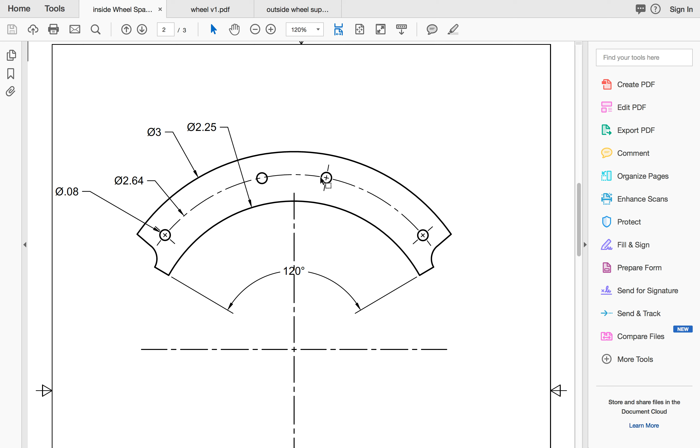Okay, this is going to be part 2 of the wheel thing. We're going to be working on the inside spacer, right here. This kind of goes, and all it is, because the rubber band thickness is thicker than the wheel itself, or than the material we're using, which is about 0.125, and the rubber band's a little under 0.25, so we want to double it up and make space for it. So we'll have this across. We're going to do it in 3 separate pieces instead of 1, and the reasoning behind that is they will take up less space on the sheet that we laser cut, so we'll have a little bit more to work with. So let's get started on there.

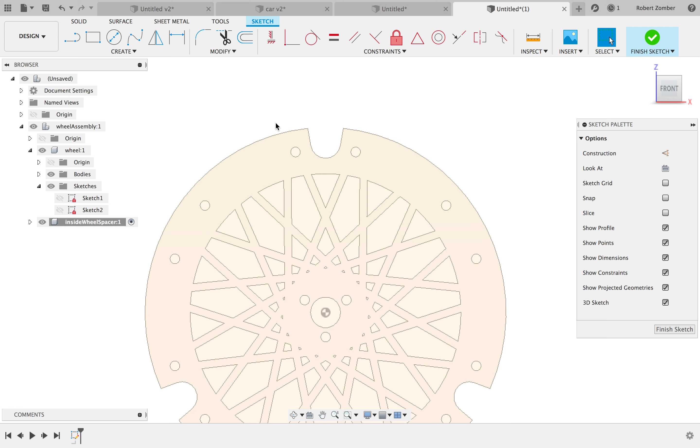And so we're going to do create sketch. We're going to base it off of this original piece because that piece is already kind of done, and we don't really want to have to make a whole bunch of new geometry if we don't have to, and pretty much everything is already there. So we're just going to kind of follow it with that. So if you can see, we have this that goes on the inside, and then 1, 2, 3, 4 holes, and then this that goes on the outside, and it's split across that joint. It's just 120 degrees, and we have all of that here.

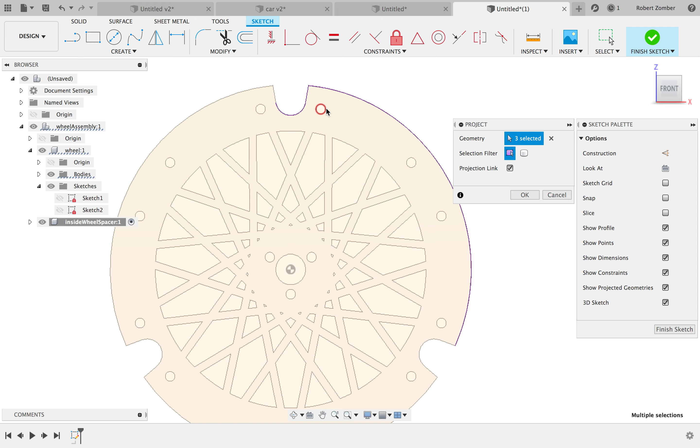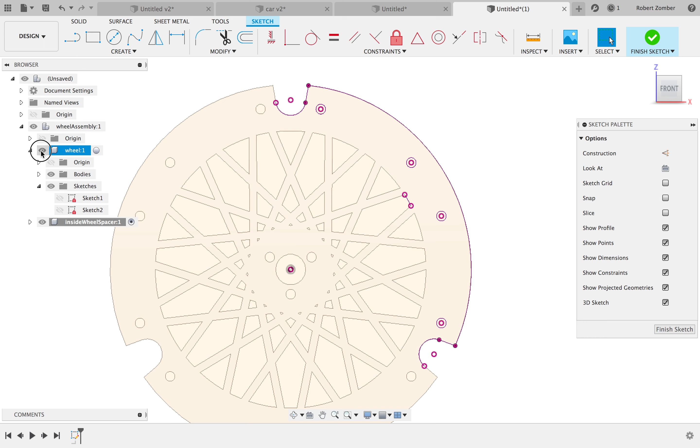So all we really need to do is do project, and then start grabbing the pieces we know we're going to need. I don't like to project everything, just don't like to. So I need these pieces, one from here, and then the center, and let's say okay. And then let's turn that old wheel off. We have that center point, so I can just go from here to here. And now from this point, I can just do a line from that to there, and then from that to there.

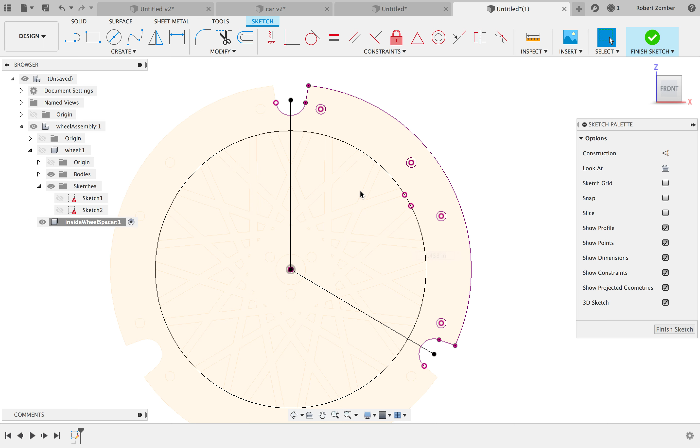And we know since there's 3 of these, and this is a circle, it's 120 degrees, so it's already done. So now all we need to actually do is just hit E for extrude on this. It's going to be 0.125 again, because that's the thickness of our material. And we are good. So now we have this entire piece done. We didn't have to do any geometry on this, and as a result, if we change anything on the first one, it's going to change the second one.

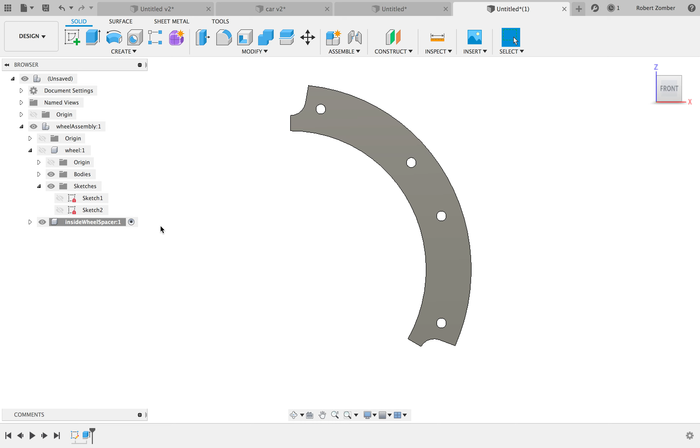So now what we'll do is we'll turn that first wheel back on. I'm going to turn my assembly back on, and I have my 1 spacer. And I realized what I should have done was actually ground this wheel before I started building off of it, because I don't want it to be moving around.

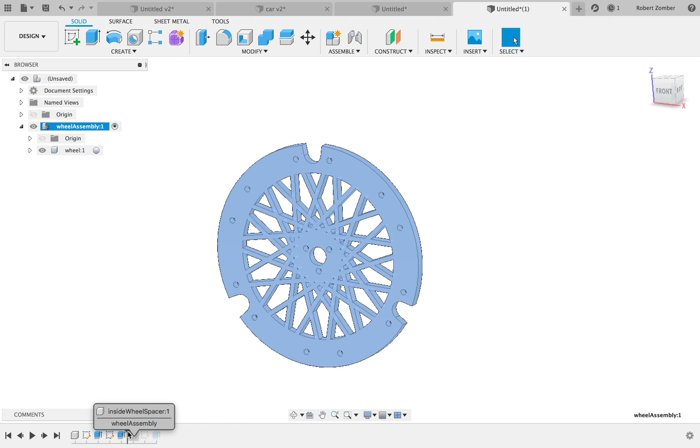So what I'm going to actually do is go back in time. This is when I created that second component. I'm going to go right before that, when I just did my second extrude. And I'm going to right-click wheel assembly and go to ground. Now that's not going to move around. And then I'm going to go back to the end of my timeline, and now it's grounded.

And so this piece is still movable. Control Z, but I want to start kind of joining it in place. So I can do J for join. I'm going to hover over the inside of this little cylinder here.

This is where my toothpick's going to go to hold it together. What that's going to allow me to do is see 3 separate points: one is this side of the cylinder, one's the center of the cylinder, and one's the back of the cylinder. And if I try and grab the back of the cylinder, it goes away.

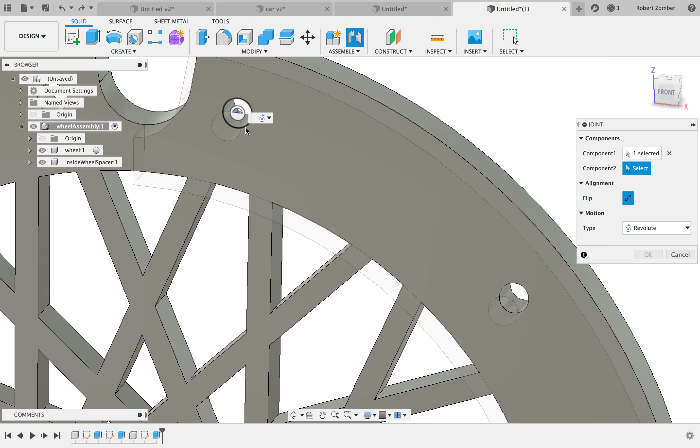So when I'm hovering, I'm going to hold Command down. I'm going to highlight over the back, click, and you'll see the front gets ghosted out because now you can't see it anymore. I click on the back one, and then it's currently on revolute, but I want it to be rigid. So I'm going to say rigid, and it shakes and says it's good to go, and I say great.

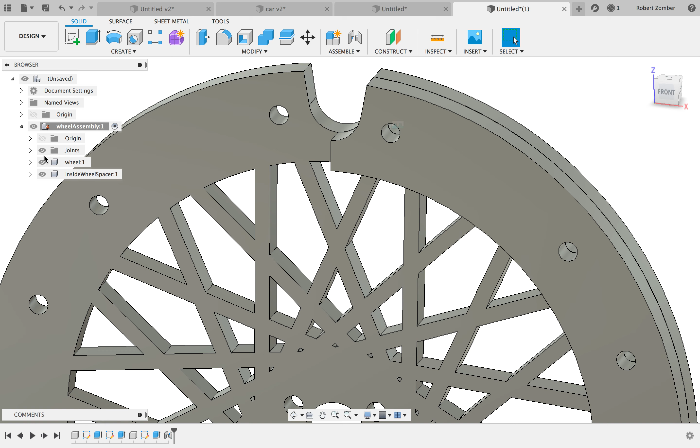Keep in mind I'm doing all this with the wheel assembly 1 highlighted, so all these joints now become part of this assembly rather than part of the main assembly, so I can really move them around. And if I copy and paste it, I don't need to do that multiple times.

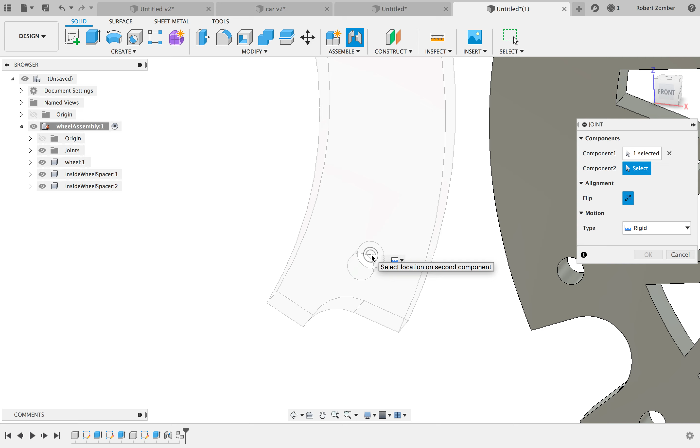Now I want to do 2 more of these. I'm going to do Control C and Control V, and move it off to the side so I can see it. J for joint. Again, I'm going to hover, grab that back one, grab that top circle, and I'm going to turn this again 120 degrees because everything is kind of in 3s right now. Then V one more time to do this one last time.

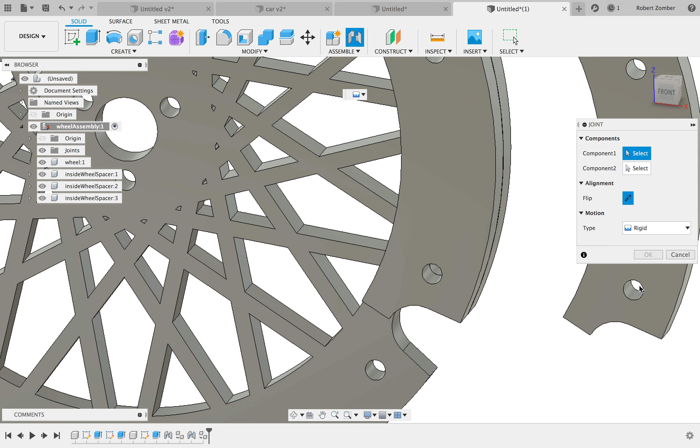So again, J, I'm going to hover over, press Command to hold it down, grab the back, and tell it I want it to go to this circle. It's going to say cool, it's straight up and down. I'm going to turn it 240 degrees, which is 120 degrees off, 360, and then I press OK, and I'm good to go.

And now I have my full wheel. it's grounded in place, and I have all my spacers done. So I say cool. And now what I'm going to do is move on to my kind of outside wheel support.

You'll notice that this is a little bit shorter here, because on this outside one, I don't actually want this to touch the ground. I want the rubber band to touch the ground. And if this is at the same height as the rubber band, then the rubber band won't, and I want as much traction as I can from it.

You'll also notice that this one, when we build it, we're going to go straight across here in the front. We're going to go across here and across here instead of having our gap here. The reason why is because we want to overlap this gap so we're not stacking joints, because it'll just be stronger in the end.

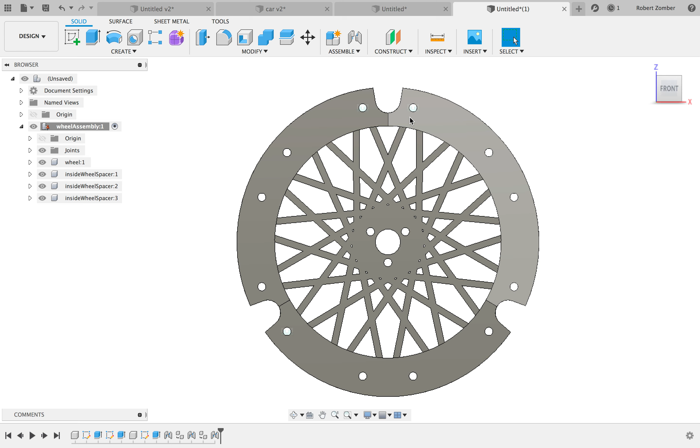So right click, new component. I'm going to call this outside support, which is I think what I called it on the sheet. Press enter. I'm going to say create new sketch. I'm going to do it on the front.

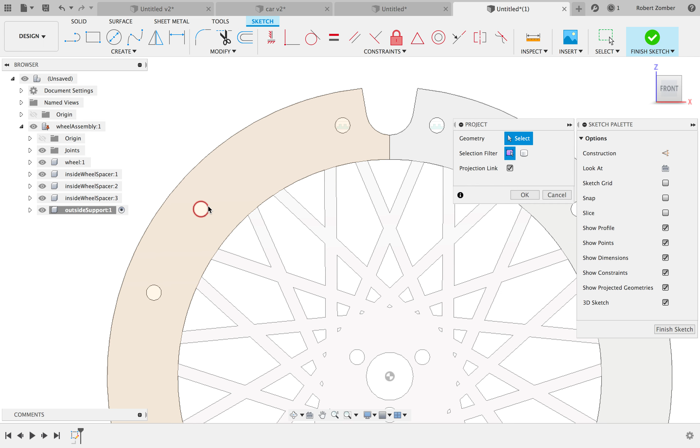And now I'm going to just start grabbing all of the pieces I need. So project, I need this little guy right here. Don't do body. I need this little guy. I need this circle. I need this little guy. I need this little guy. And as always, I need my origin.

I press OK. And then what I'm going to do is actually just right click and isolate, so I just don't have all the extra stuff in the background to worry about at the same time.

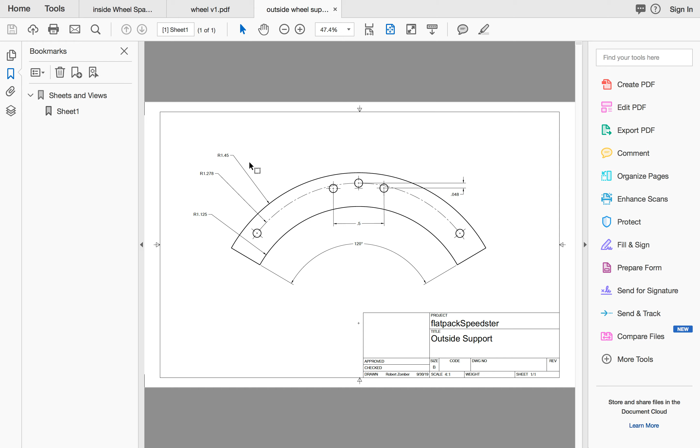So from there, I'm going to have my inside circle here and then my outside circle. So my inside circle is 1.125, and 1.45 for the outside, and those are both radius. The inside I can just drive off of here. And then the outside was 1.45, which is 2.9 total.

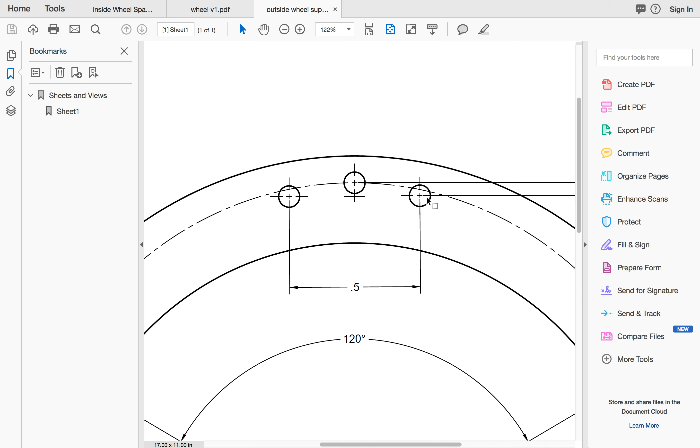And then I have one in the center here. I have one extra circle here that I'm going to add, centered across here, and it is 0.048 above. That is what the toothpick's going to go in, and that toothpick is what is going to actually hold everything in place.

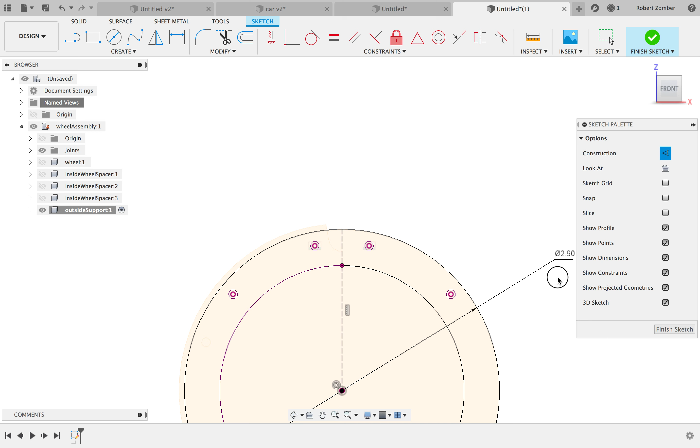So I can just draw a line across, or actually I'll do X for construction. I'll do my vertical line, which I'll use later. I'm going to move this dimension off to the side. I'm going to do L for line across here. Actually, I don't even need to. I can do C for circle.

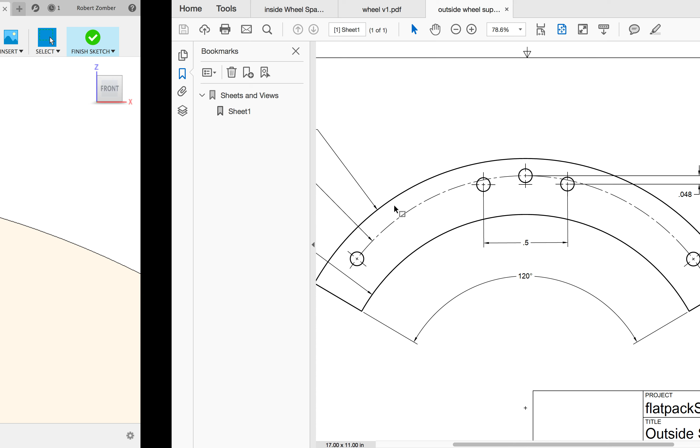It is 0.08 again, which is what all these toothpick holes are. Don't want it to be construction. It's on this line, so I know it's going to be centered between these two. And then it's just 0.048 above. So D here to here.

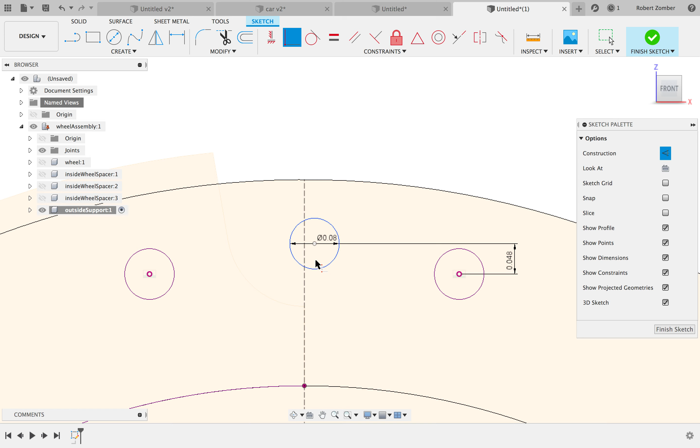So it's over constrained. Why is it over constrained? That's why. Let's try it again. Here to here. 0.048. Great. And then now it's saying it's not defined. So I do want it to be defined. I just didn't want it to be at that same point, but I want it to be coincident with that line. And then there we go.

So the next thing I need is the lines coming out here, because everything else is defined by stuff that I've already done. So I'm going to go L for line. I'm just going to shoot it up somewhere around here. Don't want construction. I'm going to do L line again, and then somewhere around here. And again, it doesn't really matter at this point as long as they're touching the origin and they're touching the outside.

And I'm going to do symmetric for these two across that same center line that I did before. And then for the dimension, I can either go off the center and do 60, or go one to the other and do 120. I'm just going to go off the center and do 60. And now this point up here is exactly what I need.

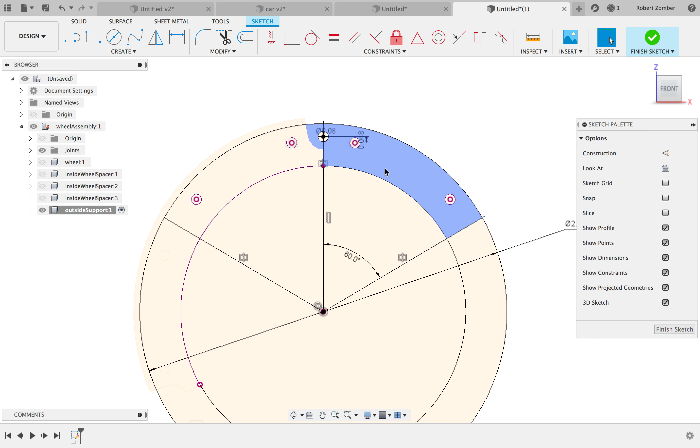So I'm going to say E for extrude, and I'm going to grab my pieces and do 0.125. And now if I right click and say unisolate and go back to my full wheel assembly, I can see it in place.

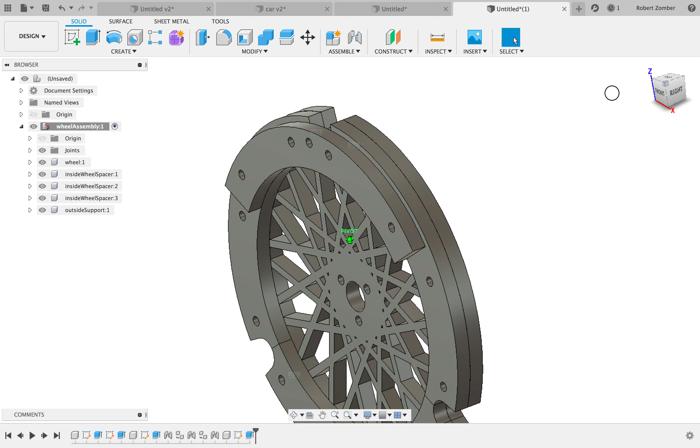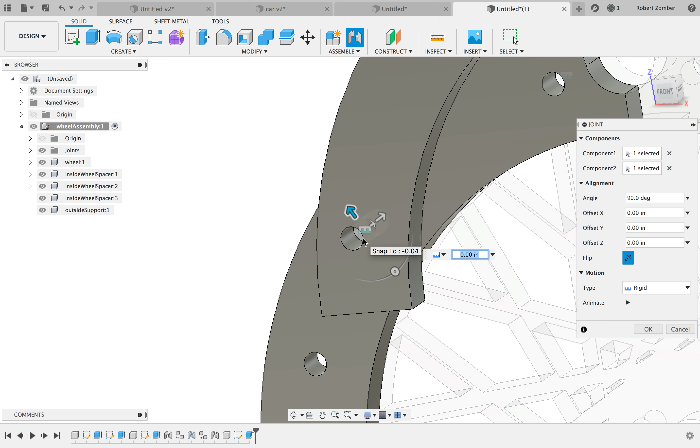And what I'm going to do is take 6 of these and put them across the front and the back. So the first thing I'm going to do is join this one, J, put this at an angle where I can kind of hover a little bit and see. Hover over the tube, command, grab the back one, grab the front one, and go. I don't know why that put that at an angle, but let's modify that.

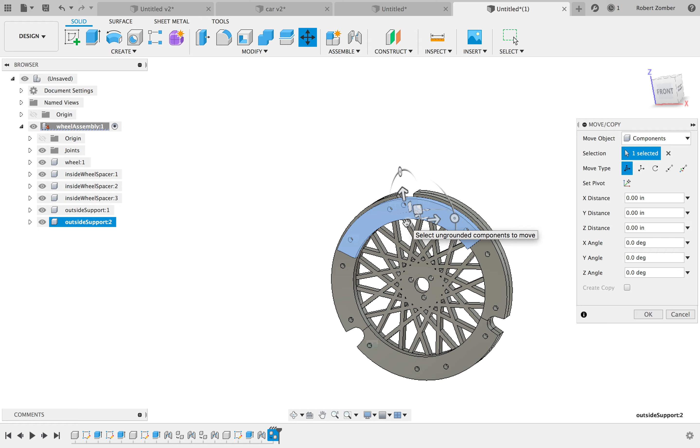All right, and then I'm going to do it again. Outside support, Command V. Now, from here, J, hold command down, grab the back one, grab this front one, and then rotate it in. And then one more time, V.

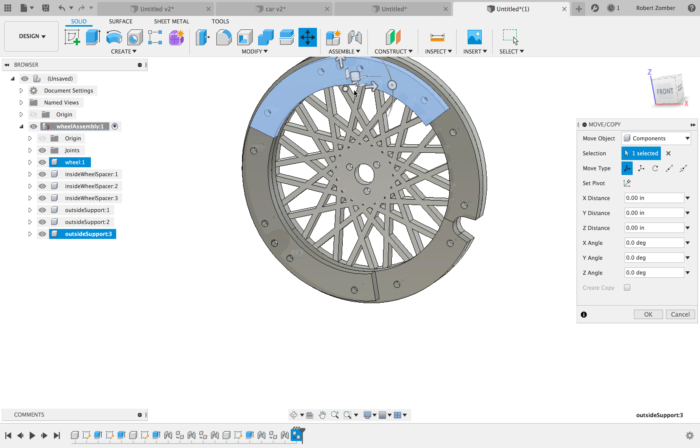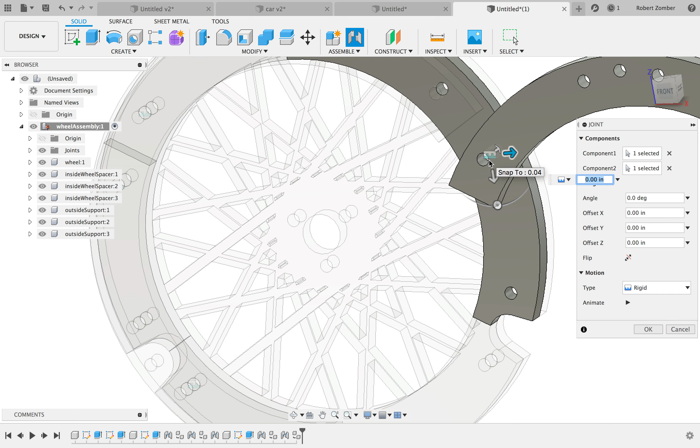Move it over. J, back one, front one. Did I freeze? Perfect. And then rotate it down. And then I'll just do the same thing on the back.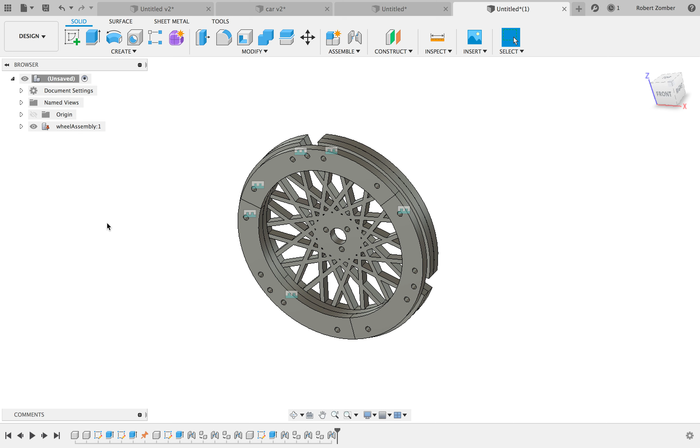Now what you'll notice, I'll do the same thing on the back later, but what you'll notice is if I need a second one of these wheels, because I'm building whatever I'm building, I go back to the top, wheel assembly 1, copy and paste. And now I have this entire wheel assembly with all the joints, all the pieces, and everything else in it individually. So if I make any edit to this first one, I'm still linked to the second one. I don't need to do it a second time. So I'll go like that, and I'm ready to go.